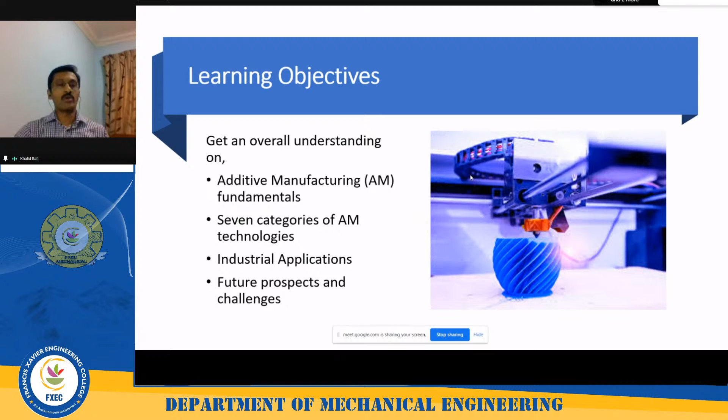So today's presentation is basically on a technology called additive manufacturing, and I'll be covering some fundamentals and applications of the technology for the next hour. So the learning objectives for this webinar are to give you a fundamental understanding of additive manufacturing technology, the different types of technologies that come under additive manufacturing, some of the industrial applications, and the future prospects and challenges for this technology.

So before moving into additive manufacturing, let us talk about what's happening in conventional methods. We use different methods to produce parts like drilling, machining, casting, cutting, forming. We can categorize these technologies into two. One can be called formative manufacturing, which involves forging, casting, stamping, and molding. The next one we can call subtractive manufacturing, where we do milling, drilling, and turning to remove material from a bar stock and get the final part. This is how we make parts in a mass way.

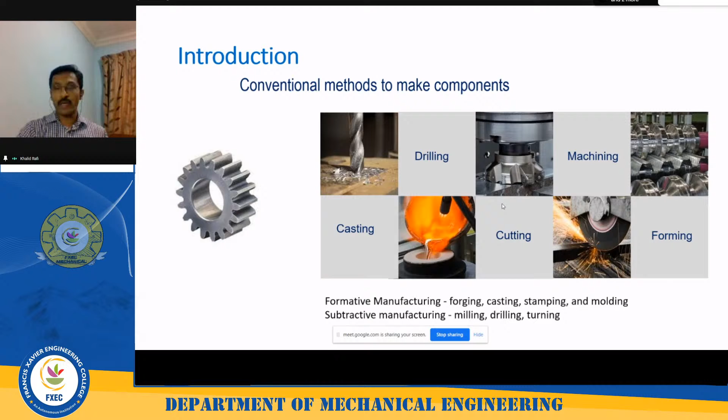However, there are some limitations of the technology as well as advantages. If you get into the advantages, it's mainly used for mass production, and it is repeatable. We have a variety of materials available for conventional processes like injection molding; you can see more than 80,000 polymers available for injection molding. And since the technology has been there for quite long, we have a larger skilled workforce, and the learning curve is almost matured. So we don't require any additional specialties.

So we still rely on these conventional manufacturing technologies, and they cover around 3 trillion of the manufacturing market. However, there are some limitations. One of the main limitations is design constraints, which means you are not allowed to design whatever you want because of the kinds of tools and molds that we use. And if you want to make a small quantity of components, it is not economical. Also, we need a high capital investment to set up a big factory with all these machines.

Another aspect is producing complex parts. For example, if you want to create a honeycomb structure with conventional processes, it's quite difficult. And most importantly, the tooling cost, the cost required in getting different kinds of molds as well as cutting tools. So these are some of the limitations we still face in conventional manufacturing, and we need to look for solutions.

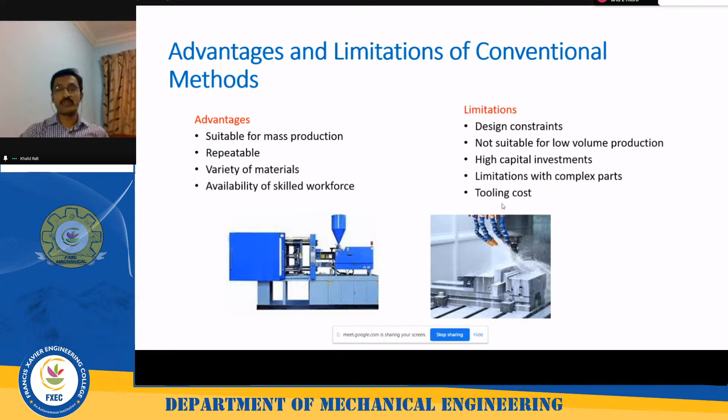So when it comes to quick design iterations, design is one of the main issues with conventional manufacturing. If you want to do design changes quite often, it's quite difficult in conventional processes. Similarly, if you want to make complex designs, that's another caveat. And for low volume production, again, it's not that economical. So what's going to be the alternative in that case?

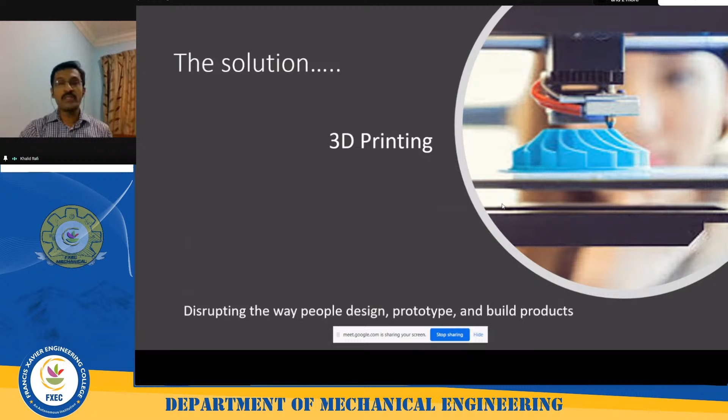The solution we can think of is a technology which has been in the market for roughly around 30 years. It's called 3D printing; that's the common name people know. This technology is currently disrupting the way people design, prototype, or build products. This technology has been there from the 1980s onwards, and let's see how it works.

Fundamentally, 3D printing is nothing but creating a product by adding materials layer by layer from a computer model. This is the fundamental concept. Whatever technology I'm going to discuss in the next few slides, they all work on the same concept of layer by layer addition of material from a 3D model in a computer. So keeping that in mind,

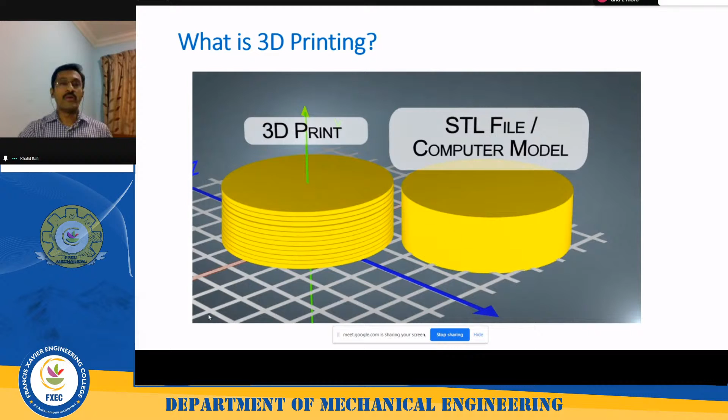what can we make with 3D printing? Is it something trivial, or is it something science fiction based? No, we can create parts right from toys up to rocket engines. You can find a variety of applications across multiple industries using 3D printing. Some of you may be familiar with many of these technologies, so for you this presentation will reiterate your knowledge. And for those who are new to the technology, this is going to be exciting.

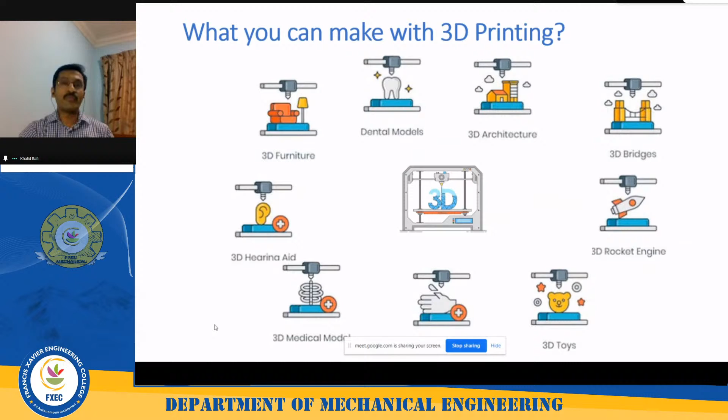So you can make different things using 3D printing. So how big and how small can you go with this process? You can even manufacture things with dimensions less than 2 millimeters, and you can even go up to 1,500 millimeters in a build. Recently you can see multiple images here where people build boats using this 3D printing process. People use parts for aerospace applications using this process. So the application range is wide, and you can imagine different applications where this 3D printing process can fit in.

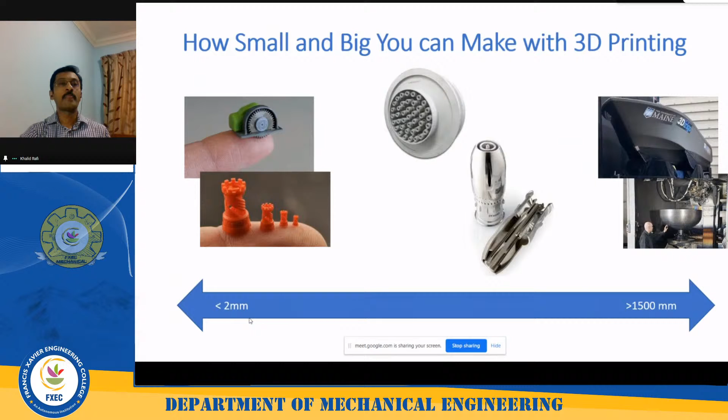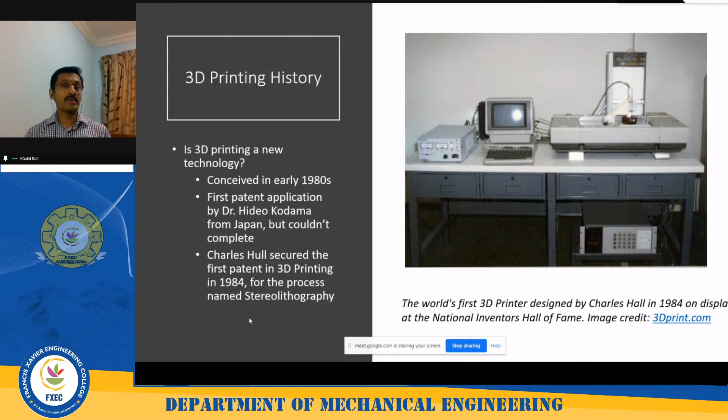So when was this process originated? Even though 3D printing is considered relatively new, that's not correct. 3D printing is a pretty old technology, invented back in the 1980s. This technology was first developed by a scientist named Dr. Hideo Kodama. He was from Japan, and even though he started working on 3D printing, he couldn't complete the patent. But a person named Charles Hull is the one who technically secured the first patent in 3D printing. That's back in 1984. And the technology at that time was called stereolithography.

And even now, the technology is called stereolithography. This particular technology was developed by the company called 3D Systems. Chuck Hull is the founder of 3D Systems, and they are one of the major players introducing equipment for 3D printing. Over the years, a lot of developments have happened, and a lot of new technologies came in. In the past 30 years, you can see the technology has matured from prototyping to industrial applications.

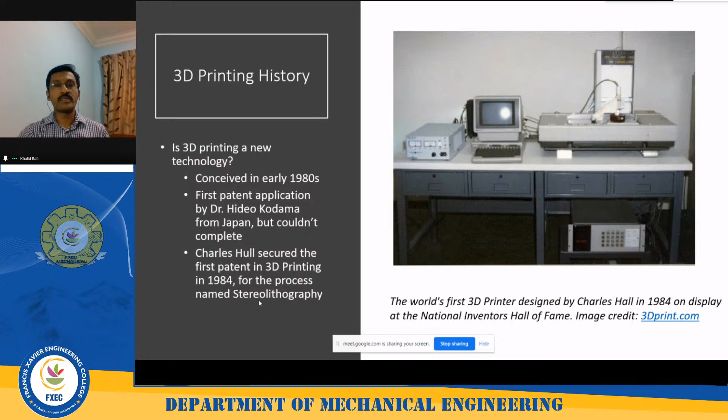So what was this technology called in the very beginning? Most of you might have heard the term rapid prototyping as part of your mechanical engineering classes. This technology was called by multiple names: rapid prototyping, desktop manufacturing, direct digital manufacturing, solid freeform fabrication, and there are multiple other names if you Google it or look into the history of 3D printing. But the two key terms people currently use are 3D printing and additive manufacturing. 3D printing is considered a layman's name because most magazines use the term 3D printing. But being a technologist or a manufacturing engineer, we use the term additive manufacturing.

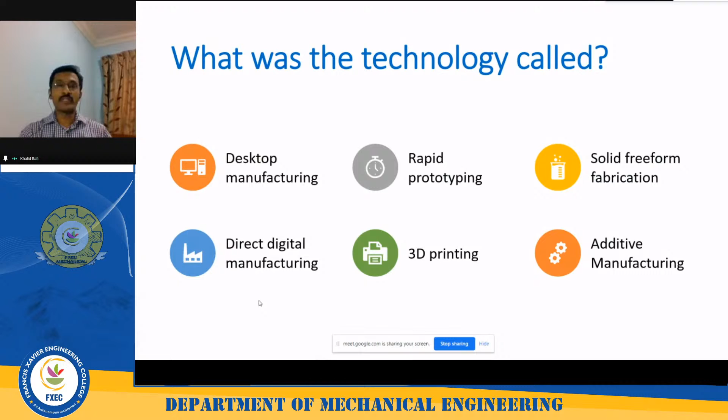So why do we call it additive manufacturing? Additive manufacturing is the official industry standard term coined by the ISO ASTM committee. There's a standard called ISO ASTM 52900, which covers the terminology you need to use when you talk about additive manufacturing. This terminology is based on the nature of the process, because we successively add materials layer by layer to make the product. That's why we call this additive manufacturing. As per the definition, it's a process of joining materials to make objects from 3D model data, usually layer upon layer, as opposed to subtractive manufacturing methodologies.

Moving on, in all these presentations, I'll be using the term additive manufacturing interchangeably with 3D printing. Both terms can be used, but from a research or industry perspective, the terminology we should use is additive manufacturing.

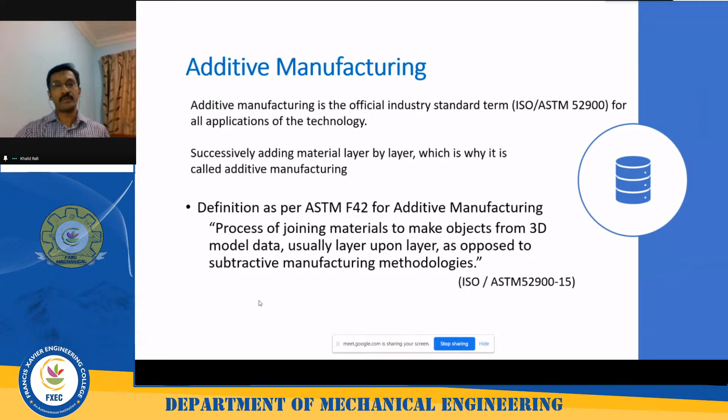Now let's see the different categories of technology which come under additive manufacturing. Additive manufacturing is an umbrella term, and we cannot have a single technology to solve different problems. So we have different categories of additive manufacturing technologies which can be used for multiple applications. It depends upon what kind of applications, materials, and scale you are looking at. Based on that, additive manufacturing technologies have been classified into 7 different categories, which came from the ISO ASTM standard on additive manufacturing terminology.

So why do people go with these terminologies? Because a lot of machines or companies in the market use their own commercial terms which cannot be used across the industry. That's why, based on the nature of the process, AM technology has been classified into 7 categories: binder jetting, material extrusion, material jetting, sheet lamination, vat polymerization, powder bed fusion, and directed energy deposition. We will go into detail on all these processes in the coming slides. But one thing to keep in mind is that in all these technologies, the fundamental concepts remain the same.

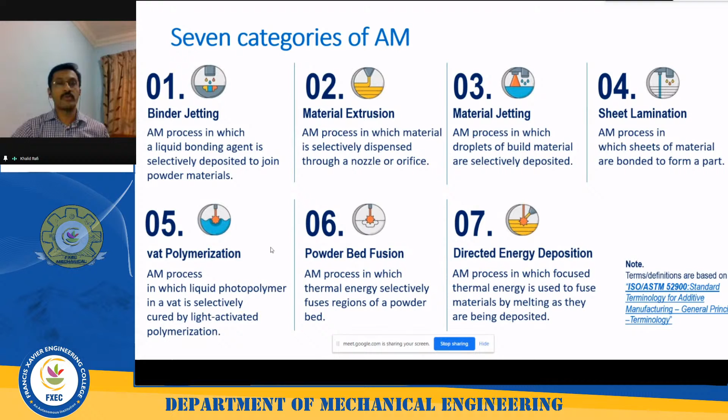So this is the first technology I want to talk to you about, that is vat polymerization. Vat polymerization is nothing but using a resin as a material to create the product. Based on the 3D model that we gave to the system, a laser beam comes and tracks a single layer and solidifies that layer alone. So you can see the laser is now coming, and then one layer is solidified. Then a slider or a recoater coats another material on top of it, and the process continues until you get your final part.

Another interesting thing is the solidified material that you are seeing in this violet color is different from the remaining material, which means the remaining material is untouched and can be reused. You can see the printed part here, which forms only the actual model that we gave to the system. So you still have the vat. Vat is nothing but a vessel; that's the reason why it got the name vat. And these materials can be reused for your next application, so that makes this process much more economical.

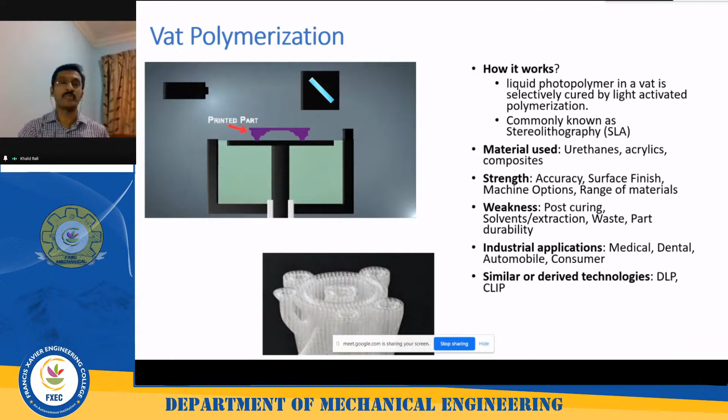Moving to the next one, the next category is called material extrusion. This is the most common technology. If you go to any college or school that has a 3D printer, it's a material extrusion based one. Here, a filament is extruded through a nozzle and deposited on the platform. It deposits one layer first, the table moves a little bit down based on the layer thickness that we give, and it keeps building layers until it makes your final part.

Here you can see two colors, dark blue and light blue, which means two different materials are used: one to print the actual part, and the other to support any overhangs or light features. Once you print the part, you can remove the support material. There are different ways to remove it; you can simply put it in a solution so it dissolves and you get your final part. This technology is now used for a variety of applications, from prototyping to end-use production. One of the strengths of this process is that it has production-grade materials.

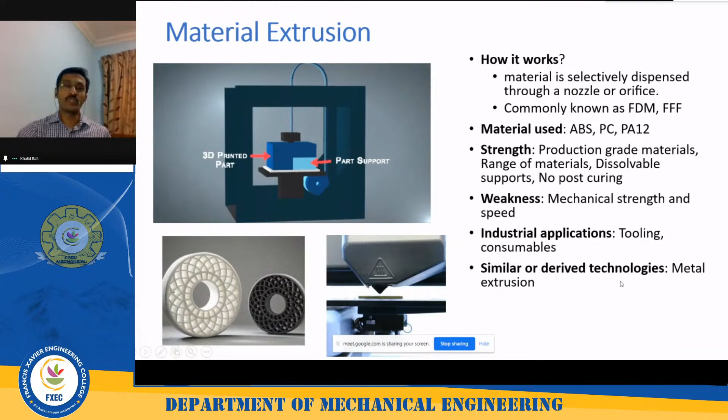And the common name for this technology is FDM. So that's a name that most of you might have heard about. It's called fused deposition modeling, or another name is FFF, that's fused filament fabrication. So this is one of the most common technologies that most of you might have encountered before.

Another technology is called material jetting. I would say this particular technology is pretty similar to what we do with our 2D printers. In a 2D printer, we use an inkjet cartridge and we print a picture. Just imagine that after printing a picture, you keep on printing on top of this picture so that you will get a 3-dimensional image of the picture.

So the difference here is that imagine you remove the print cartridge and add in a cartridge which contains plastics, or resins with different colors. So this was typically called a 3D printing process in the very beginning, because it actually 3D prints right in the build chamber itself. And another advantage here is that you can see a light coming just after this. That is a UV light, and it cures each layer immediately after printing it.

So this is a big difference between this material jetting process and vat polymerization, where in vat polymerization you have to take out the green part and put it in an oven to do the curing process. But here, you will get it cured within the machine itself. So one of the strengths of this particular process is very good surface finish and accuracy.

And most importantly, we can have colored cartridges so that we can get any product with any desired colors you want. So the main industrial applications for this technology are mainly prototyping, product development, and marketing purposes. When you do product development, and you want to make sure that your customer would like the product, then you can have all those varieties of colors in this product.

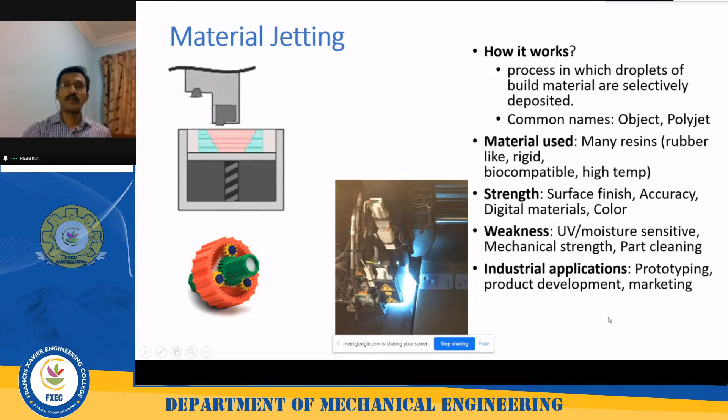The next technology is called binder jetting. In the previous one, what we saw is material jetting, which means you jet materials and you add materials layer by layer. But here we are not adding material, but rather we jet binders. Binders are glues which can stick two layers of material so that they get bonded. And this is a technology where we can use multiple materials. We can even use sand, we can use clay to produce a part.

So the animation that you are seeing here is basically a process of creating a sand mold. What you're seeing in this light yellow color is a layer of material. Once one layer of material is spread, we have a print head coming up, and the print head will dispense the glue so that only that layer of sand or material will get glued.

And in the next step, you will see another layer of powder material coming on top of that, so that those regions will get glued together. And this process continues until you get your final part. You can see the next step where there's another powder layer coming up, and this is called recoating. And again, you can see the head coming and dispensing the glue. So this continues, and you'll get the final product.

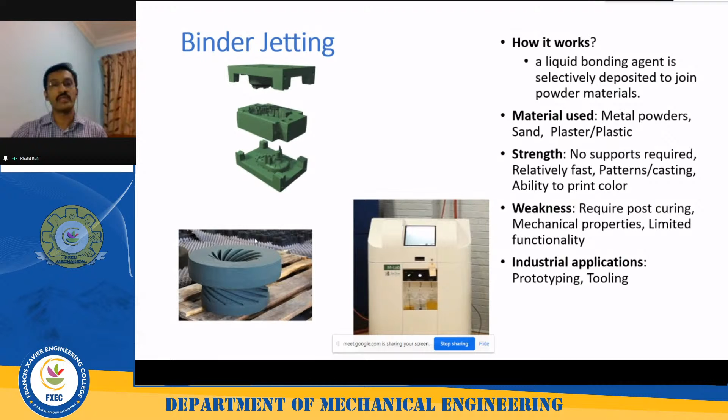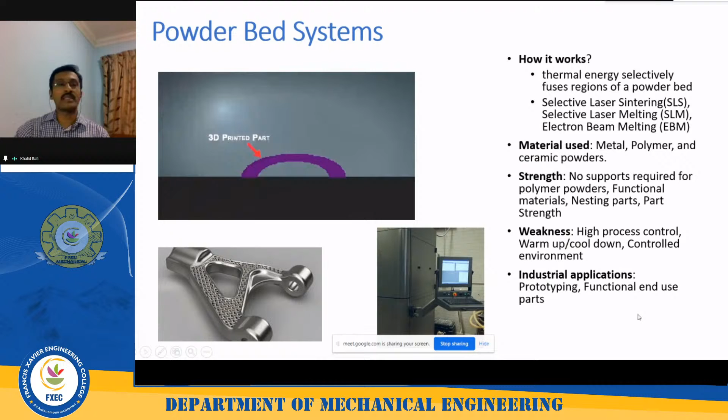And we can print multiple designs in a given build chamber. And for part strength, for all functional applications, whenever someone asks for 3D printing for a functional application, this is going to be the first preferred technology. And the weakness here is that you have to control a lot of parameters. For example, a laser process contains somewhere around 100+ different parameters, which could affect your final part. And the important industrial applications here range from prototype to functional and structural end-use parts.

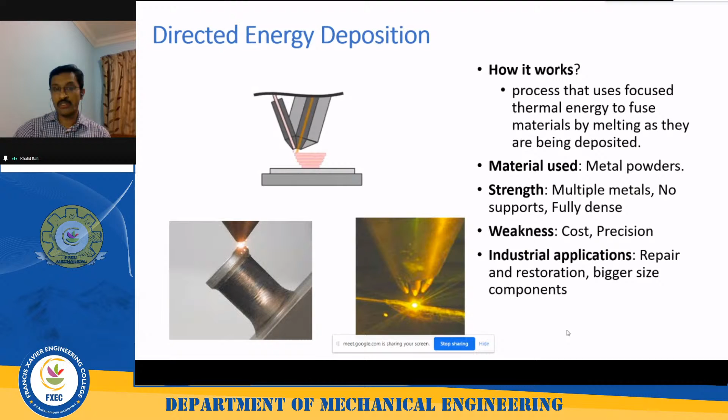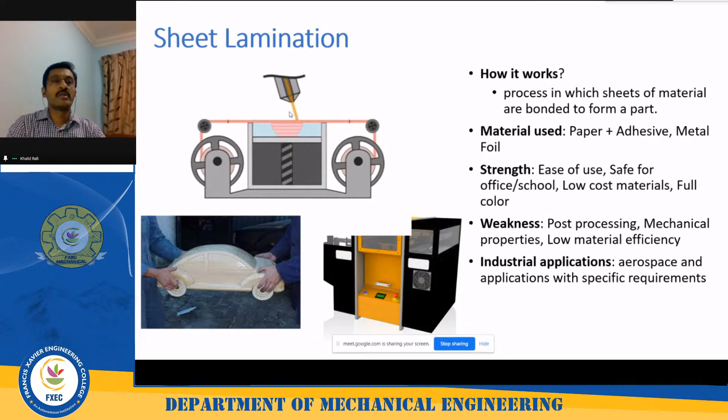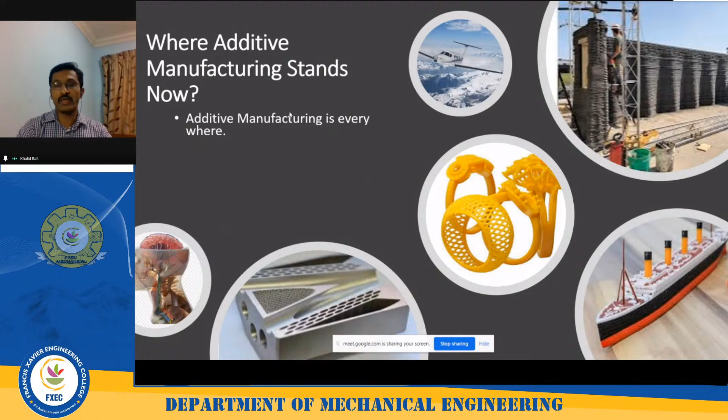So when it comes to applications, where are we? Is it still a prototyping tool, or are we moving ahead with industrial applications with this technology? So if you see additive manufacturing, it is now everywhere. You name it, in toys, or in aerospace. In all these industries, you can find some applications using additive manufacturing. So these are some of the typical industries who use additive manufacturing. So typically automotive, defense, production, aeronautical, medical, consumer. We will see each and every industry in the coming slides.

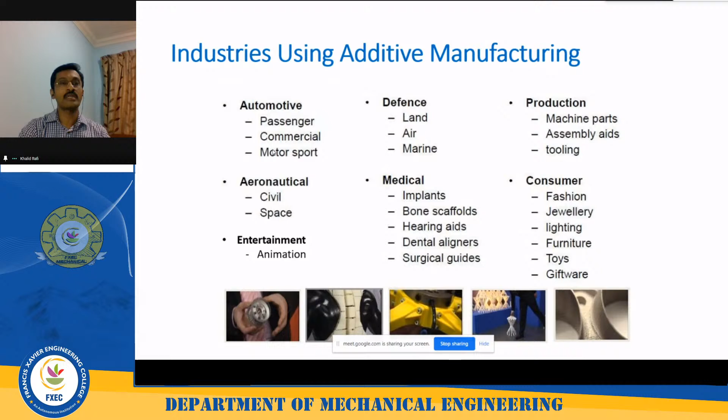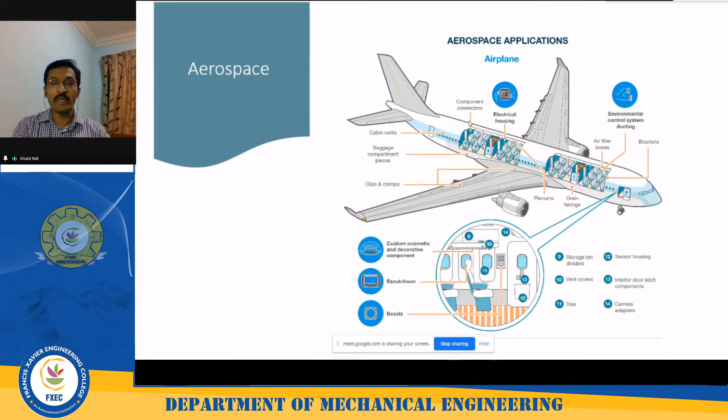So initially they were used only for non-critical parts or cabin parts. So even now, most of these aircraft companies are using additive manufacturing for producing a lot of cabin interiors. And now additive manufacturing is also used for making engine components like turbine blades and things like that. So as I said before, if you remove 1 pound of material from an aeroplane, they are saving 14,000 gallons of fuel each year. Imagine the case of a big company who is having a large fleet of aeroplanes. So that's the reason why aerospace companies started using additive manufacturing as one of the major technologies.

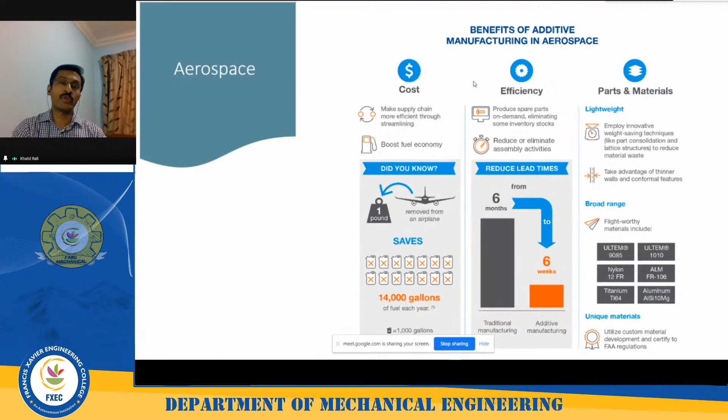And now I would say this is more or less matured in the aerospace industry, and more than 5,000 small components are now produced using additive manufacturing in Airbus as well as in Boeing aeroplanes. And other companies, other aeroplane service companies like Etihad Airways, or even airways companies in Australia, New Zealand, they're all trying to use additive manufacturing for what they call repair and overhaul for the aircraft, which can save a lot of money and time for them. And another advantage is they need not keep a lot of inventory, so they can produce things just in time as required.

Another important application area is medical. So you can see different 3D printed implants which have gone into patients' bodies. So it's almost 10 years now that people started using 3D printed implants. For example, there are some knee replacement and hip replacement implants, and these are the two major surgeries that you come across when it comes to orthopedic surgeries.

So now 3D printing is used for creating or even producing those parts. The advantage is that we can have these implants based on our anatomical features. We need not get off-the-shelf products which don't fit our anatomy. So somebody can scan your knees and then create a knee implant based on your dimensions.

Similarly, we are using it for creating prosthetics, matching prosthetics. So previously, if you have a hand breakage, then you will be having a big casting around your hand. But now you can have some fancy prosthetics which apply to your hand. Similarly for dental applications, and it can be used by doctors for printing medical guides.

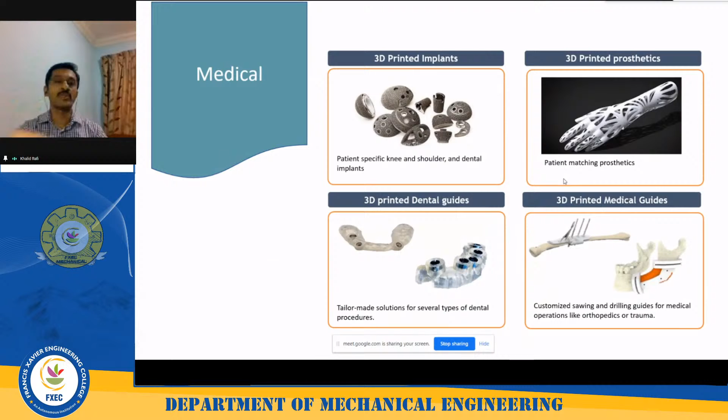And one of the important applications some of you might have observed recently is during this COVID-19 situation, where 3D printing has been used very widely for printing face shields and face masks. So we need not wait for a company to produce and ship it to your place. So they started using 3D printing to produce those face shields and face masks.

And recently, companies like Audi started customizing their cars based on what you want. So they can customize the dashboard for you. They can customize your steering wheels. So they are now allowing you to choose 16 different components in the cabin of the car so that they can customize it for you.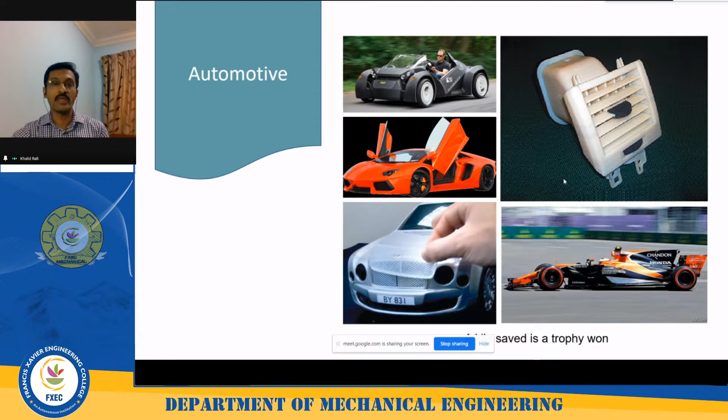So previously most of the countries were relying on China to print these kinds of shoes. But now these shoes are printed in America as well as in Germany using multiple machines. So you can see Adidas recently came out with 3D printed shoes, and so many other companies have also now started using 3D printing to print the soles for these shoes.

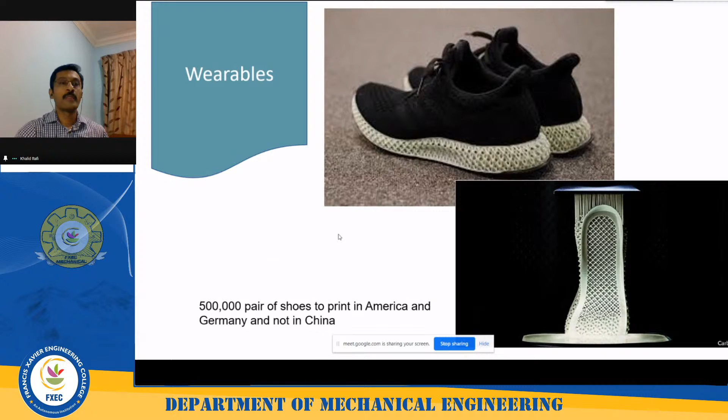And another important thing is tooling. So we can produce tools just in time or as required. Most of the time, if you go to a company, their warehouse will be full of different tools which they may be using once a year, or they may not even use for years. So that will take up more than 25% of their total inventory.

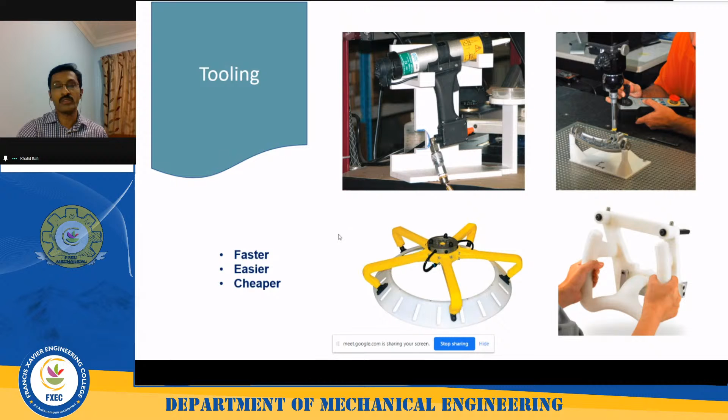So one of the important things that people are now trying out with additive manufacturing is to reduce the inventory, so that they just manufacture the tools as and when required. So tooling is another major area where additive manufacturing is finding a lot of applications.

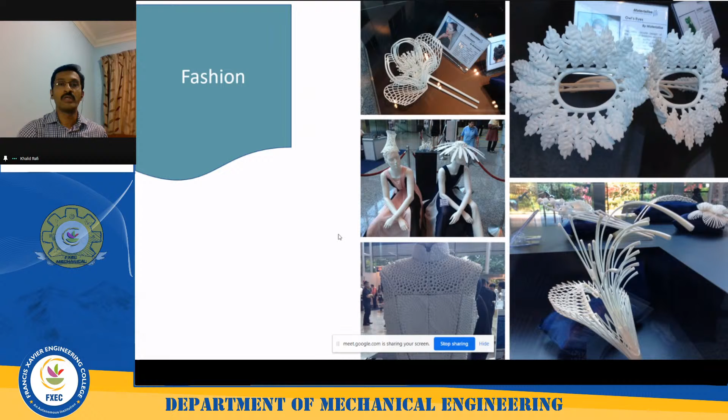Next is fashion. So the fashion industry is also getting an overwhelming response in using 3D printing. So recently, some of these fashion shows started demonstrating how 3D printing can be used to come up with versatile designs in fashion as well.

And the last one is construction. So 3D printing in construction is another major area gaining importance in industry. So 3D printing can be mainly used for mass customization. That's a general term that we use for producing parts using 3D printing, but this is used for mass housing in construction. So let's say you want to build hundreds of houses in a rehabilitation place, then 3D printing is the viable option now to create smaller houses.

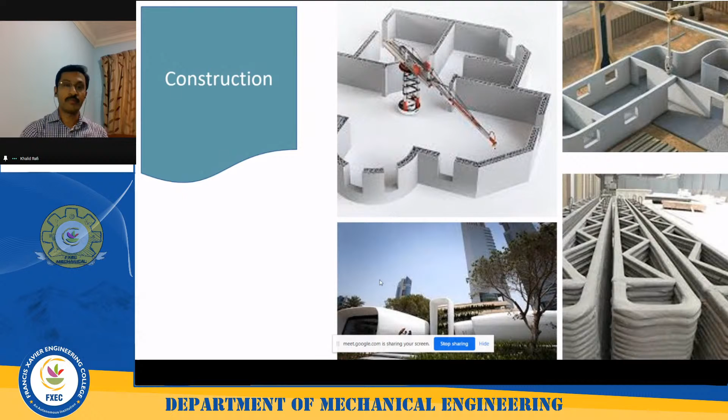So we have talked about different technologies, different applications, different potentials, but still additive manufacturing is not fully into the manufacturing stream. There are many reasons for that, and we can categorize them into technical and commercial. One of the important technical reasons is the lack of talent and current expertise. This is where people who are right now studying mechanical engineering can look on. There is a deep dearth of talent in additive manufacturing, so people can look at it as an opportunity in the future.

Then there's a lack of awareness and understanding on when to use AM and which technology to use. People feel that additive manufacturing can replace conventional manufacturing, but that is totally wrong. Additive manufacturing can only substitute or complement some of the areas in conventional manufacturing. You cannot use additive manufacturing for everything. We need some kind of specific purpose or specific need to use additive manufacturing. So before somebody gets into additive manufacturing, they should have an understanding of when to use additive manufacturing or which technology they should go for.

Another aspect is the printing speed. As I said, the process is relatively slow because you are adding material in a layer by layer fashion, and each layer is somewhere around 50-60 microns. So you can imagine how much time it will take to make a big product. But now new equipment is coming which can increase the printing speed, or which has large build volumes that can accommodate more components in a single build.

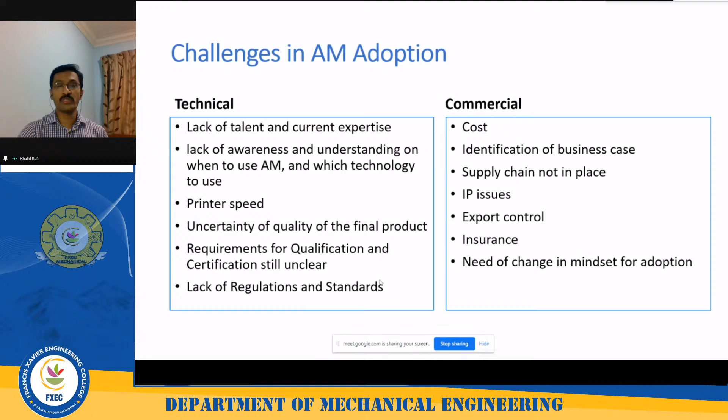Then most importantly, there needs to be a change in mindset for adoption. We are comfortable with our conventional manufacturing processes, but when we get into a new technology, people are a bit reluctant to change. They are still skeptical about the outcomes of this technology. So we need a change in mindset to make sure that this technology can be adopted and put alongside the existing manufacturing ecosystem.

And what can we see tomorrow? Some of the industrial applications that we envision are in biofabrication, which means you can use 3D printing for fabricating human tissues. This is an important research area where people are looking to 3D print human body organs. They already started printing skin and parts of muscles. Right now, those products are used for pharmaceutical applications where you can apply a medicine to that skin rather than applying it directly to a person's body. So biofabrication is a major application area, or we call it bioprinting, bio 3D printing.

Electronics is another area where you can have wearable electronics. For example, right now a battery comes either in a cylindrical shape or a square shape. Let's say you want a wearable watch and you need a flexible battery; right now that's not there. But 3D printing can now produce batteries in any shape.

Another thing is mass customization, which means we can cater to the requirements of each and every individual based on their taste. They need not look at a set of standards. For example, if you go and buy shoes, you cannot have the sizes you like. After size 7, the next size is 8. So if somebody needs a perfect fit at 7.5, there is nothing like that.

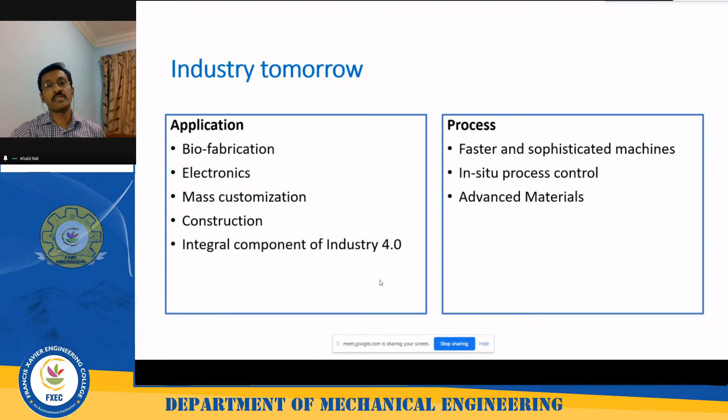And coming to the process side, we are going to get faster and more sophisticated machines. And we can have in situ process control, which means while the process is going on, we can keep changing the process to make sure that your end product will be error-free or will have all the right properties. And there are also advancements in coming out with latest materials, because if you see right now in 3D printing, the materials that can be used are very limited. So now another important research area is on coming up with advanced materials for this process.

Okay, so this is all from me about this technology. I know that it's quite difficult to get an overall understanding about the technology, but what I tried to do here is to give you a snapshot of what is there in additive manufacturing and what the technology is all about. So with this background, I think you can do research to learn more on this topic, and you are welcome to reach out to me.